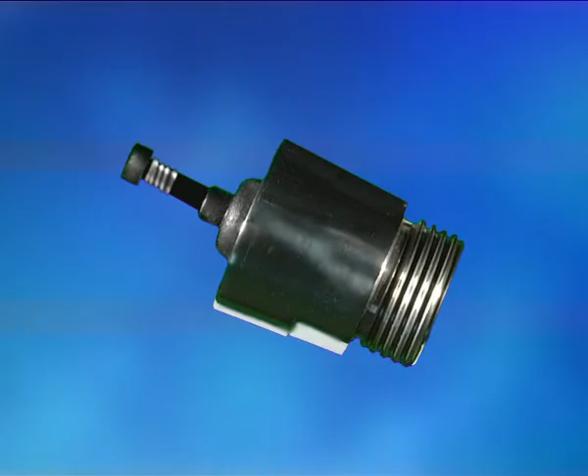EcoSave is the latest of its kind in the market. EcoSave retains both the water-saving and constant flow features of present PDD models. However, we will demonstrate EcoSave's distinct advantage of greater performance by maintaining a higher than expected output flow rate despite the low input water pressure.

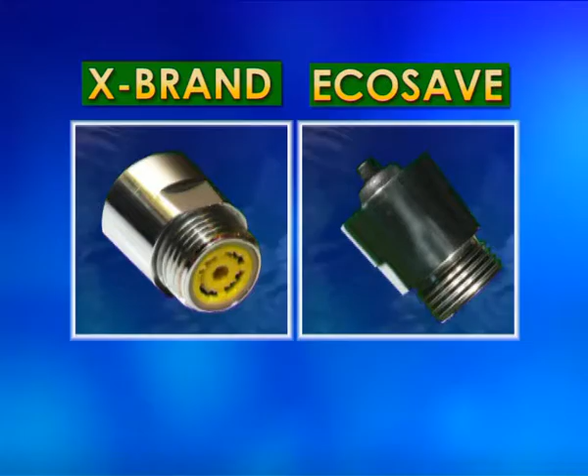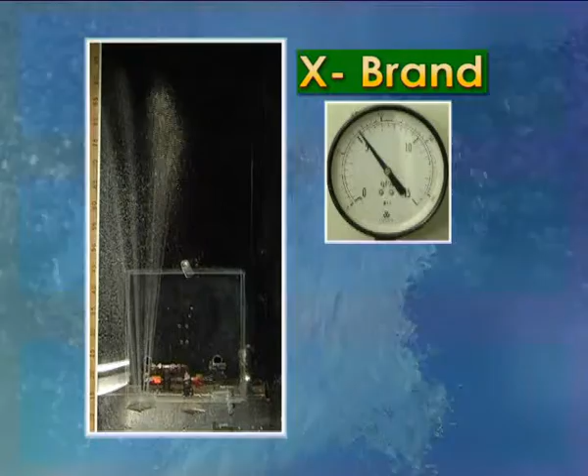Here in our specially designed chambers, we are going to perform an experiment to demonstrate EcoSave's superior high performance as compared to widely used brand X. First, we attach brand X onto our shower head. Next, we set the input pressure to an ideal high setting. The result, voila, a high output flow rate that guarantees maximum bathing pleasure.

Nevertheless, look what happens when input pressure drops, similar to bathing at a time of day when numerous other taps in the household or even the entire apartment complex are being used simultaneously. Brand X fails to maintain the previous output flow rate, thus resulting in a weaker and less satisfying output water flow. Now let us attach EcoSave to the same shower head.

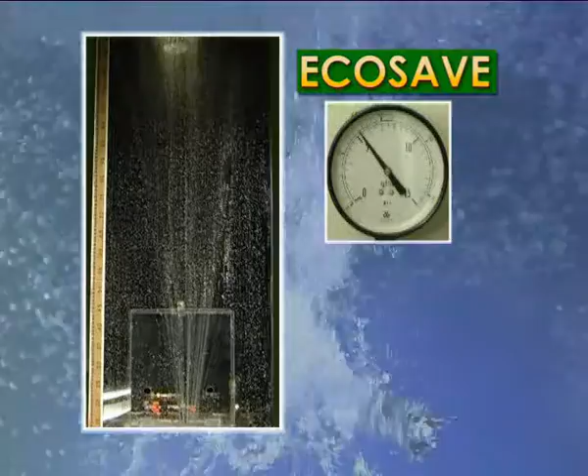Again, we set the input pressure to an ideal high setting like before. The result? Voila, similar to brand X. There is a high output flow rate that guarantees maximum bathing pleasure. Next, we reduce the input water pressure to the same level as before. Almost immediately, the output flow rate drops. But hold on a second. EcoSave recalibrates and adjusts the output flow rate to a level higher than that produced by brand X.

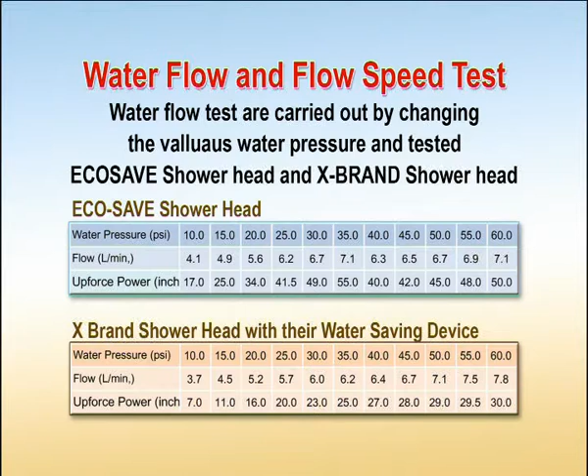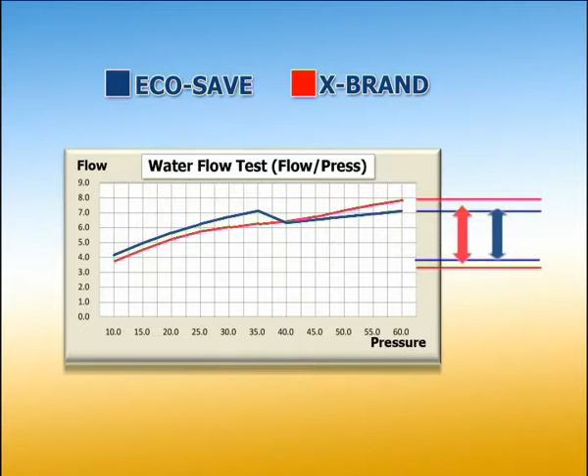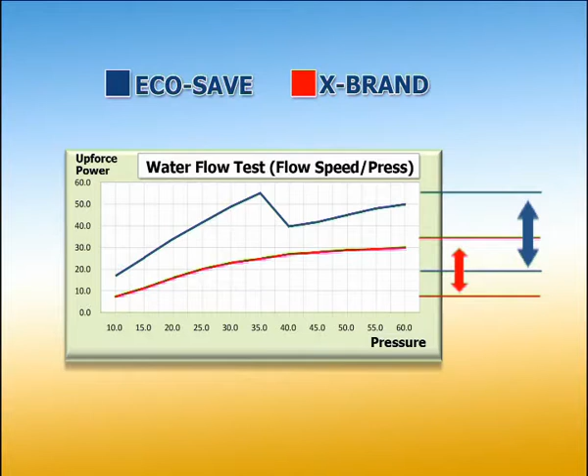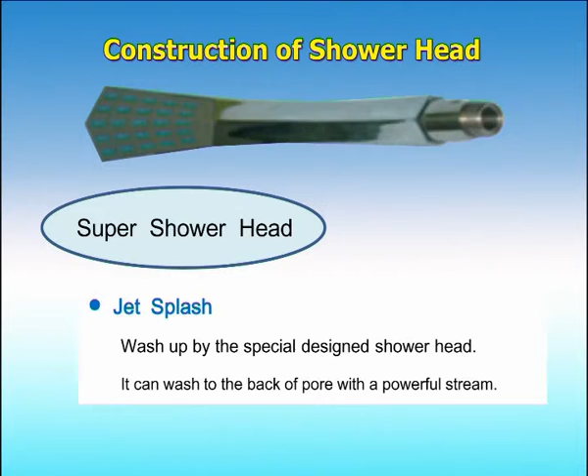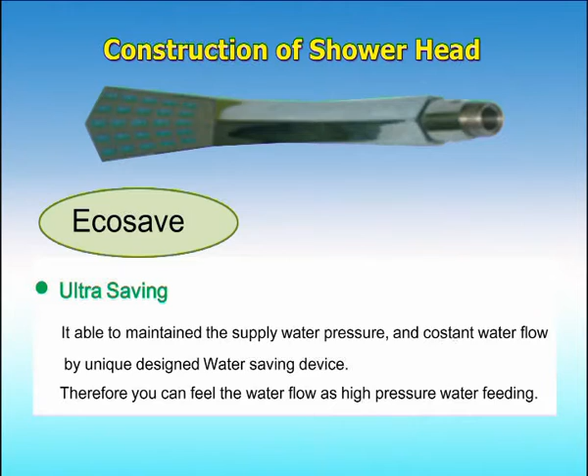EcoSave, on the other hand, yields a drop of only 1.5 liters per minute, from 7.5 liters per minute to 6 liters per minute. This is only 50% of the drop seen in brand X. The increased performance achieved by EcoSave in output flow rate during instances of low input pressure has many advantages. One of which, as seen from the present and previous demonstrations, is the increased satisfaction of bathing and cleaning under a good water flow.

It is evident from the flowchart that with a more efficient water flow maintenance device attached to the output water point, water flowing out of a residential water heater will be released at a good flow rate and with an even temperature, despite a drop of water pressure within the pipes.

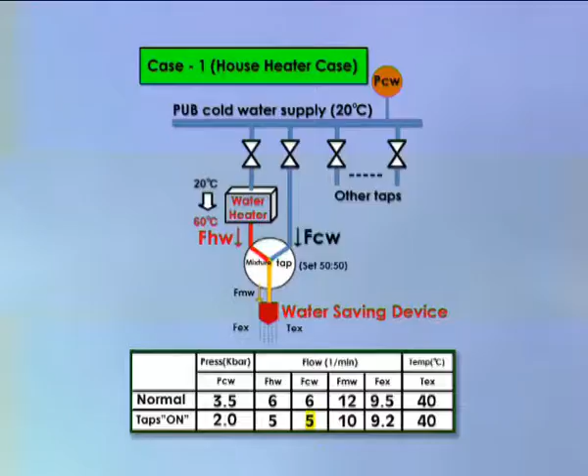The advantage of EcoSave also becomes more obvious when we look at its use in an industrial setting, for example, in hotels. There are often separate water outlets for hot and cold water supplies in such buildings. An uneven demand for either source can lead to either extremely cold water running to guest rooms or vice versa.

Fitting EcoSave devices separately at both the hot and cold water supply outlets means that any drop in water pressure due to multiple demands on either pipeline would still ensure an even mixing of both hot and cold waters, because there is only a small drop in water entering the mixing tap from the pipe that is in heavy use.

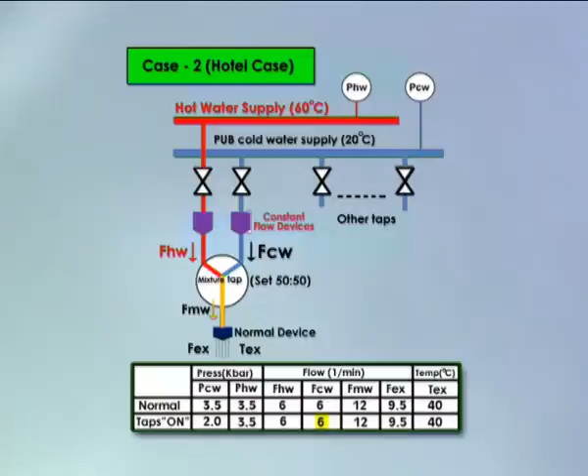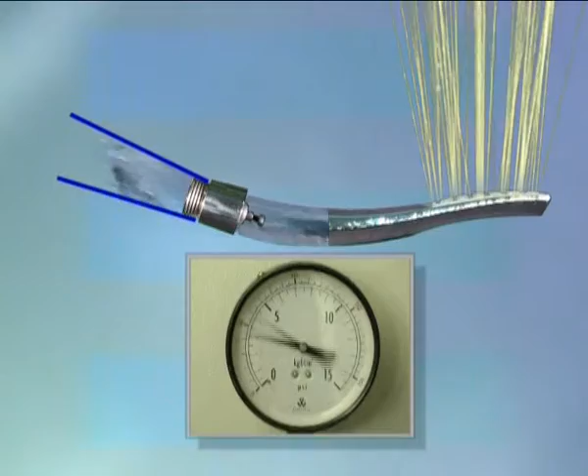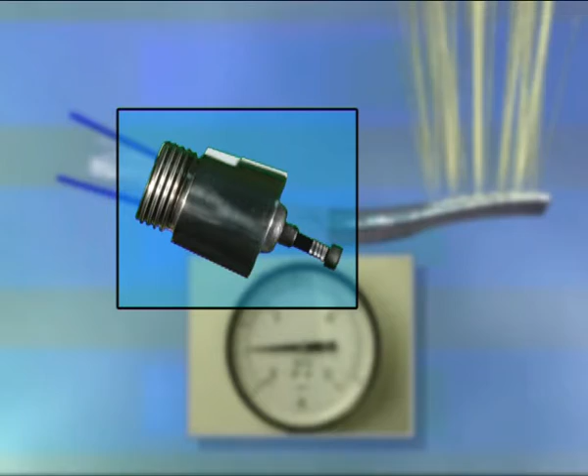EcoSave, being a pressure differential device or PDD, works by increasing the surface area of water flow when there is a marked decrease in water pressure using a dual spring mechanism. This high and low pressure spring control is able to detect subtle changes in input water pressure more efficiently than the current technology present in the market. Typical Brand X technology, on the other hand, is unable to respond adequately to input pressure changes, thus resulting in a weakened flow rate at the output source.

When the input water pressure is high, the dual spring juts out to ensure a decreased amount of surface area, which then ensures a good output flow rate. Conversely, when input water pressure drops, the spring retracts in order to increase surface area and continue to maintain an optimum output water flow.

At a competitive price comparable to Brand X, choose EcoSave, a new technology for the future.